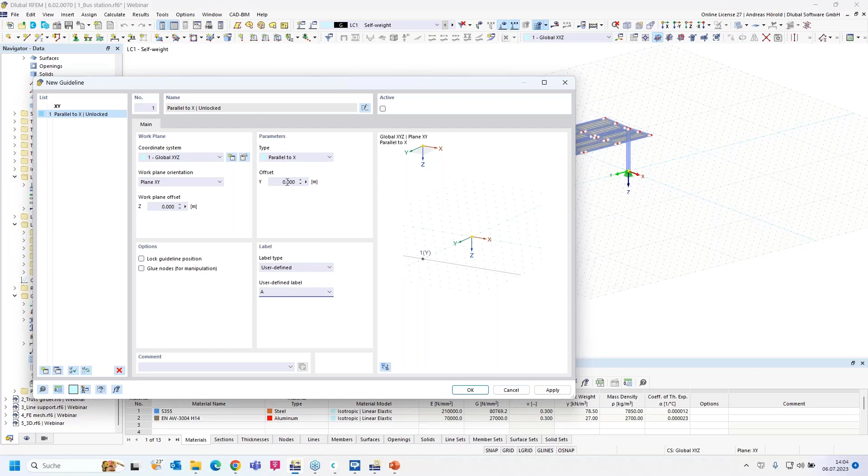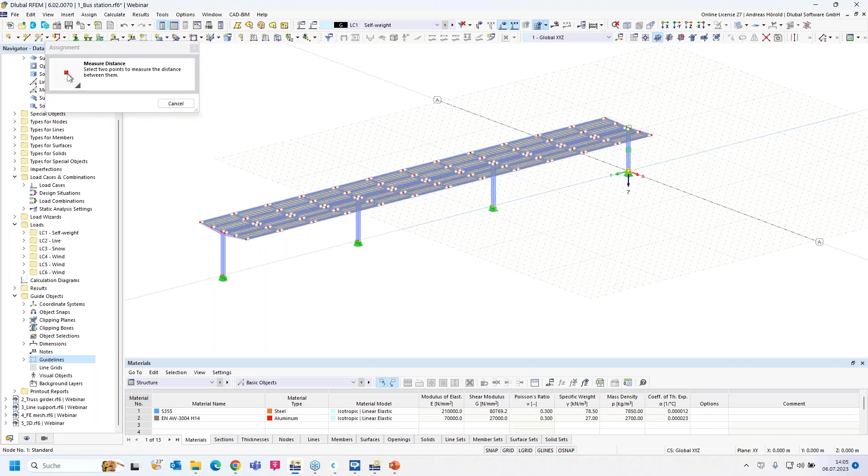So, okay, we start with the first guideline. We call it A, parallel to X, and we start with an offset 0, apply, and you can see in the RFEM window that the first guideline is created. We activate it, and then we copy the guideline, and we have to change the offset. Let's measure the distance between the two columns here. Okay, 18 meters, and we have to rename the guideline.

Apply. Okay, then we create the other guidelines, the same workflow, 36 meters, and we rename the guideline. Apply. So, and then the last guideline, I change only the offset and the name. Okay, so all the guidelines in X direction are created.

Now you can see the distance between the name of the guideline and the node is very far. You can change that. For example, when you change the grid, here by a right click, you can press edit, or I leave the dialog and show where you can find it as well at the top: tools, work plane, grid snap, and so on. Okay, then you can enter distances here, 15 plus and 15 minus in X direction, in this direction.

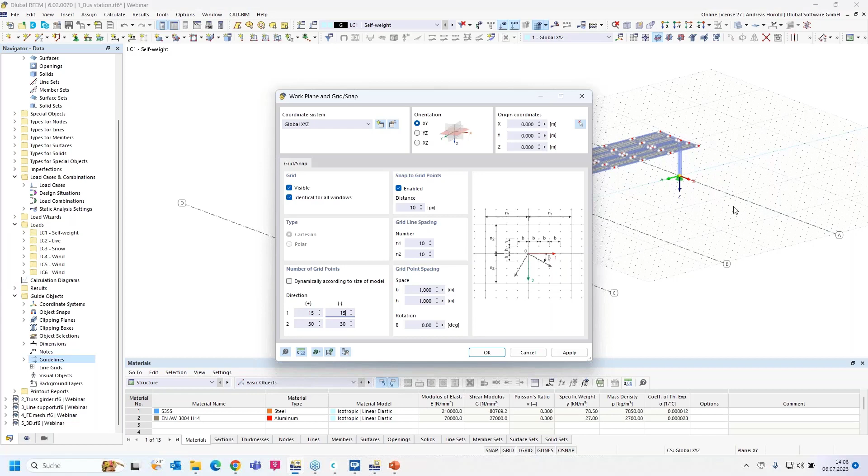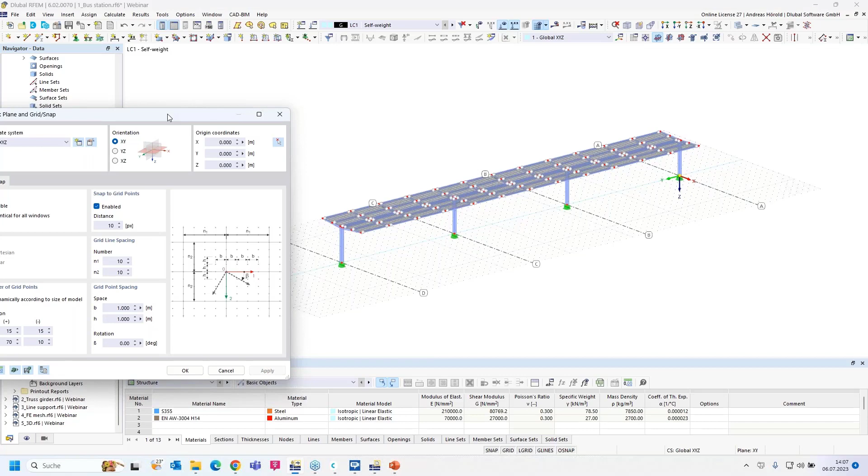And for example, 70 and 10 in Y direction. I apply. And you can see the name has been moved near the node. You can also check dynamically according to size of model. Let's do that. And you can see that the number of the grid points are created automatically.

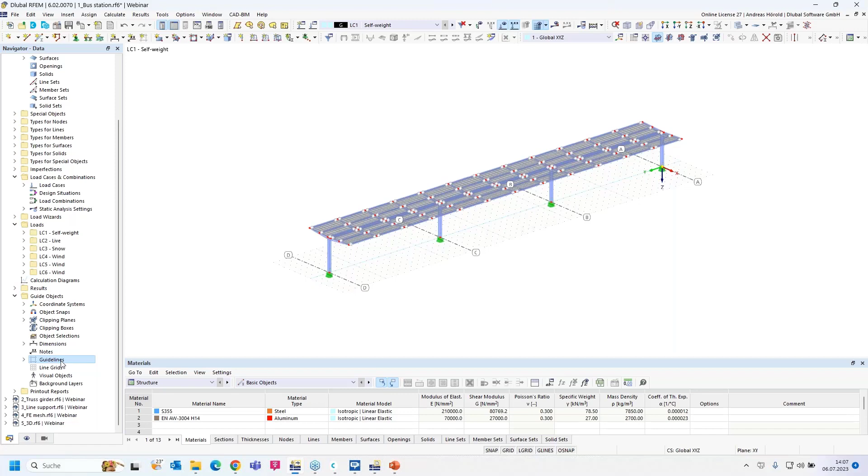Now let's create the last guideline in Y direction. I create a new guideline parallel to Y, offset 0 and a user-defined name. I name it 1. Apply that. Now all is okay.

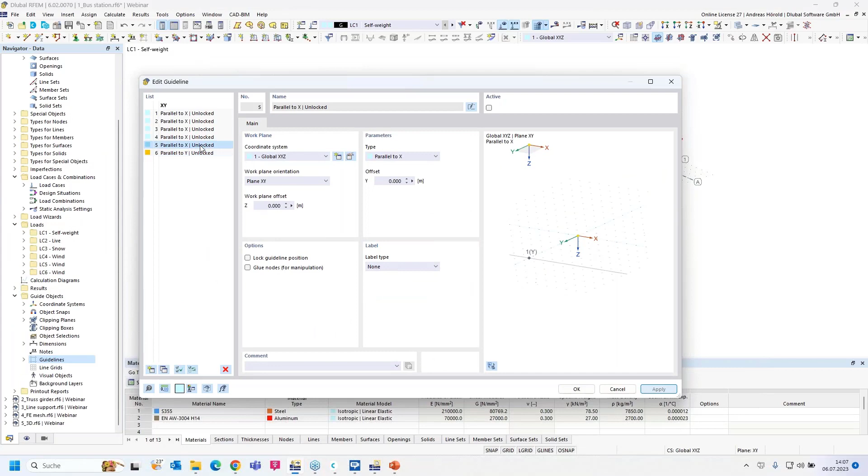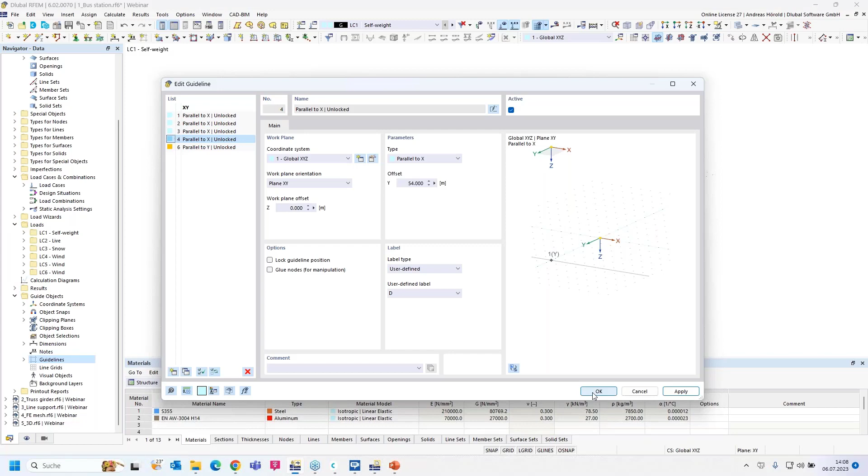So, no, this one is not correct. Okay, now you can move or copy or delete all the lines here or certain lines. Okay, now all guidelines are created. Just an example. So then we turn to the next model and the next question.

Next question is, I came across the area of load application setting in the load wizard. How does this setting affect the magnitude of the load in my model? So this is a load that has been created with the load wizard. I double click on it. You can see that dialog. And how you can create such a load, I will show that.

At first, you have to select in the base data here left at the top under add-ons the load wizard; that must be activated, but this is a default setting. The combination wizard and the load wizard are selected by default. Okay, and then

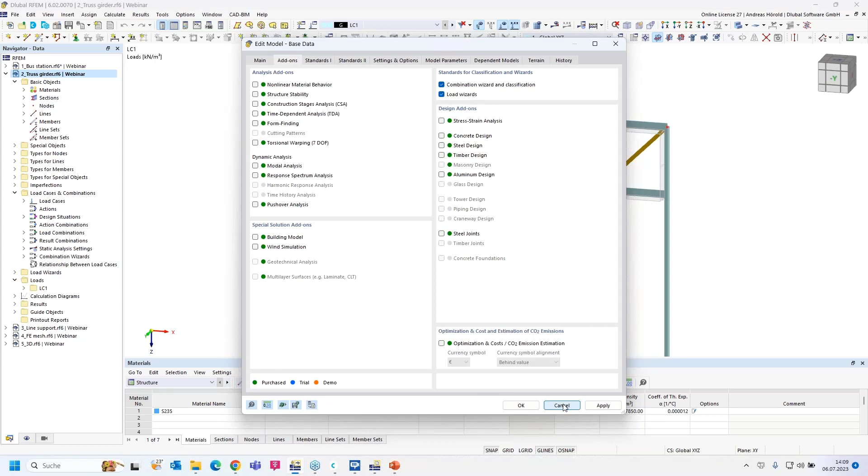here on the left side at the top, insert, there are the load wizards. There are different load wizards. Member load from area load wizards, for example. This is the load that I created before, what you can see in the model. There are also the snow load wizard and the wind load wizard, for example, and other wizards.

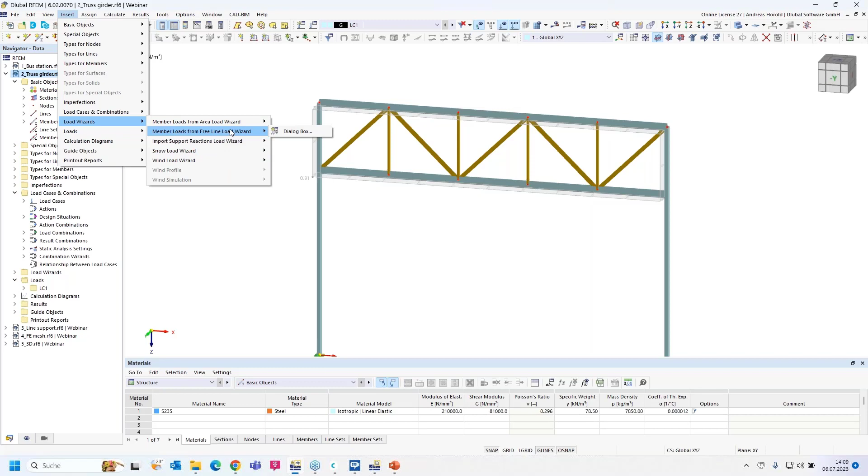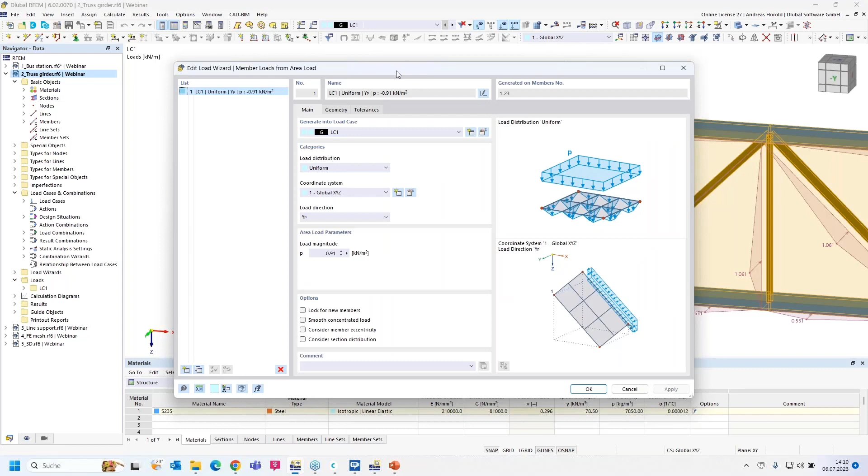Okay, I double click on, or let's display it separately. Now with a right click, I can display the loads separately. So, and now I double click on the load and I open the dialog. And under geometry, you can see this setting, fully closed plane.

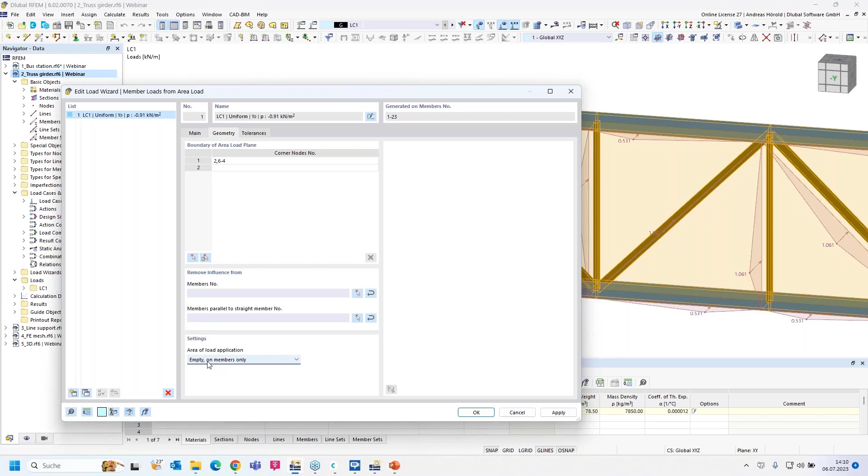The complete, where there's, for example, a plate or the trapezoidal sheet over the members, and all members get a load, and the wind affects the full area here. So, and if you want that only the members get a load, only this small area, then you have to select empty on members only.

We can see that at the moment the verticals and the diagonals get a load of about 1 kilonewton per meter, and if I apply that, you can see that the load has been decreased. Only the members are affected by a wind load.

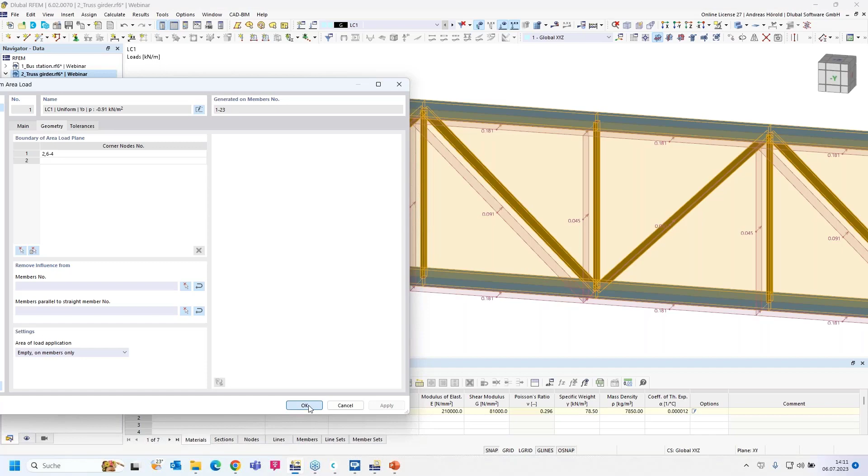So, and if you, for example, change that member, at the moment the width is 10 centimeters or 100 millimeters, and if I rotate the section, for example 90 degrees, you can see the load has been decreased from 0.1 as for this diagonal, and now it's only half of this value.

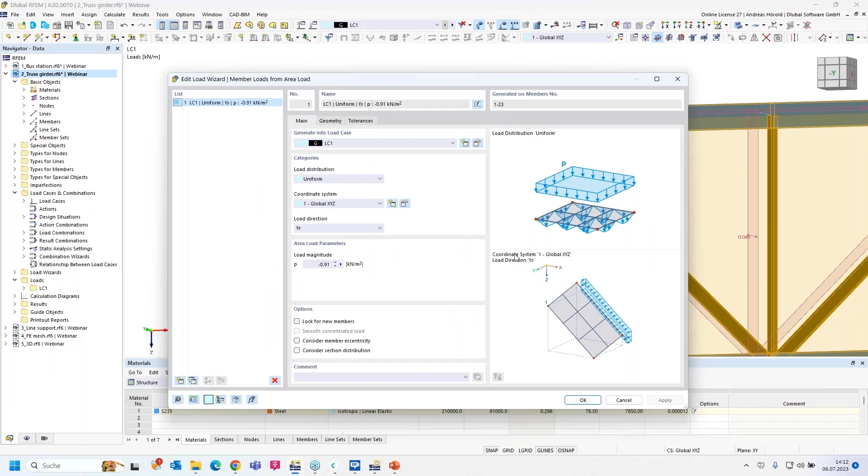Okay, that's the setting. I changed that back, or I press undo, and you can see now the load is about 0.1. And I do another change. Imagine that, for example, a trapezoidal sheet spans from the lower beam to the upper beam, and only these beams are affected by the load or support the trapezoidal sheet. Then you can remove the influence from members parallel to straight members.

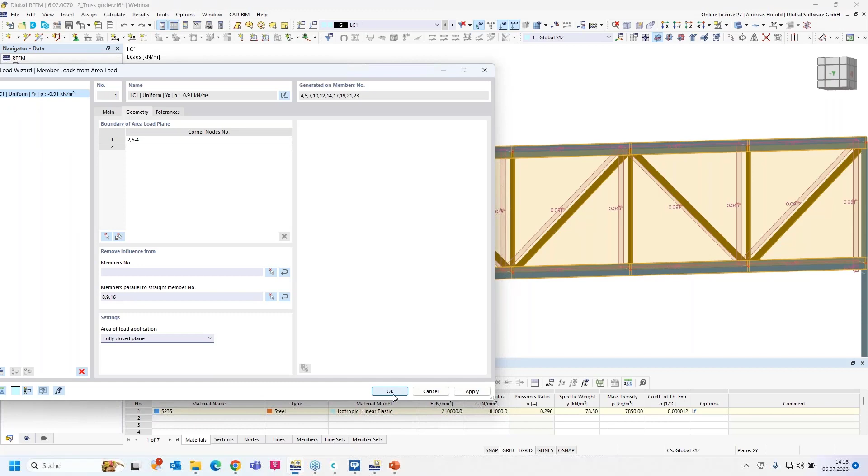Number, I select all the 3 members, and all members that are parallel to these 3 members don't get a load. Let's try that. Fully closed plane. Okay. So, and now that's the effect when a trapezoidal sheet spans from the lower to the upper horizontal beam.

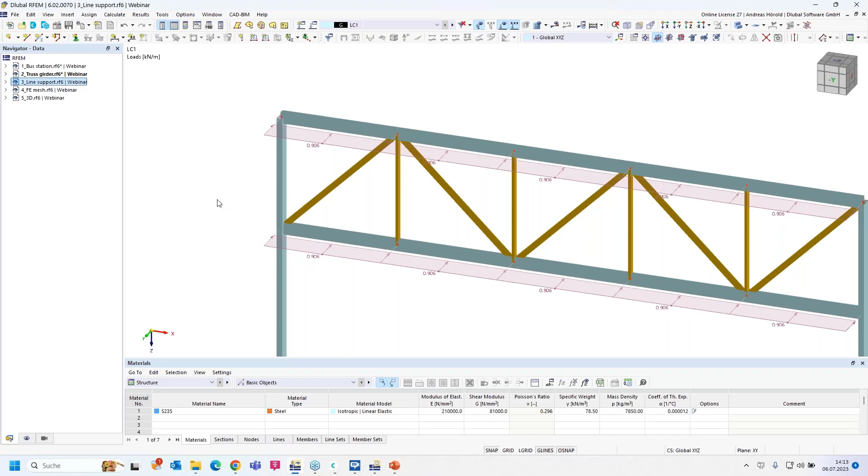Okay, let's turn to the next model and the next question. A surface model, a concrete slab from a building, for example. And the question is, can I get the program to calculate the spring of a wall for line support without modeling the wall at the same time? In an earlier webinar, we showed a similar feature for the nodal supports.

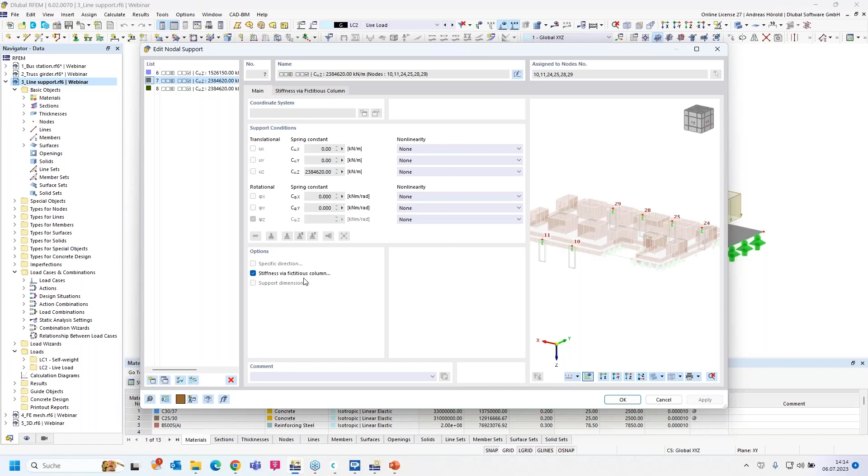Let's double click on this nodal support. And when I press the edit button, you can see where is selected stiffness via fictitious column. And when I turn to this dialog, the model is supported by elastic surface foundation, elastic nodal support, and so on. You can enter dimensions, the height, and so on.

Then if the column head is hinged or semi-rigid, and when you change that, the values for the springs are changing.

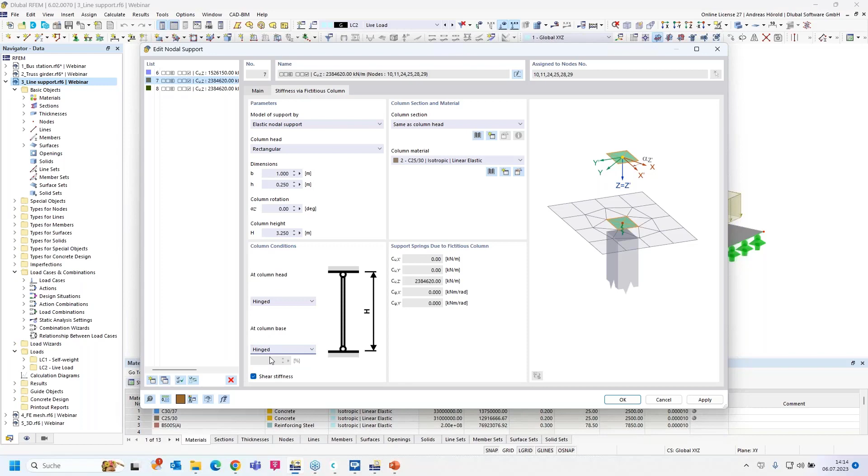Okay, so I leave the dialog, and we have got a similar function for the line supports. I double click on the line support and edit all the used line supports. Now you have to check the stiffness via fictitious wall. In the preview, you can see the walls already.

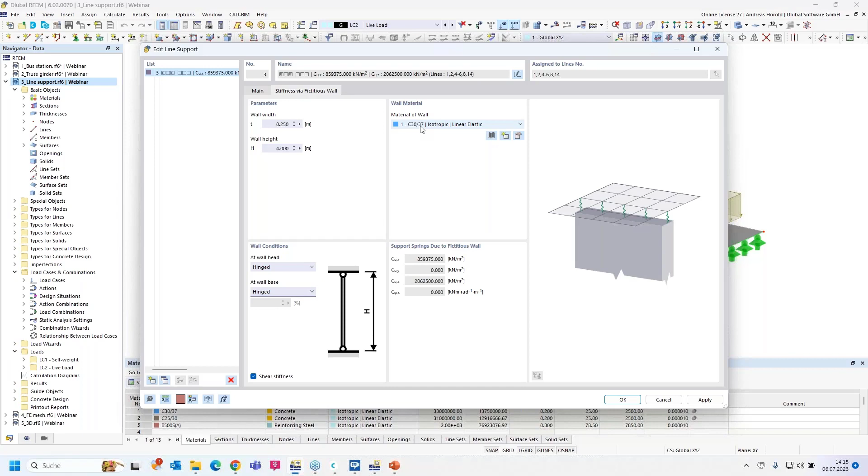So then you can enter a thickness of the wall, a wall height, and also if the wall head is hinged or rigid. Also for the wall base. You can enter a material; I'll leave the concrete material as it is at the moment. And you can see, as I mentioned, in the preview the considered wall.

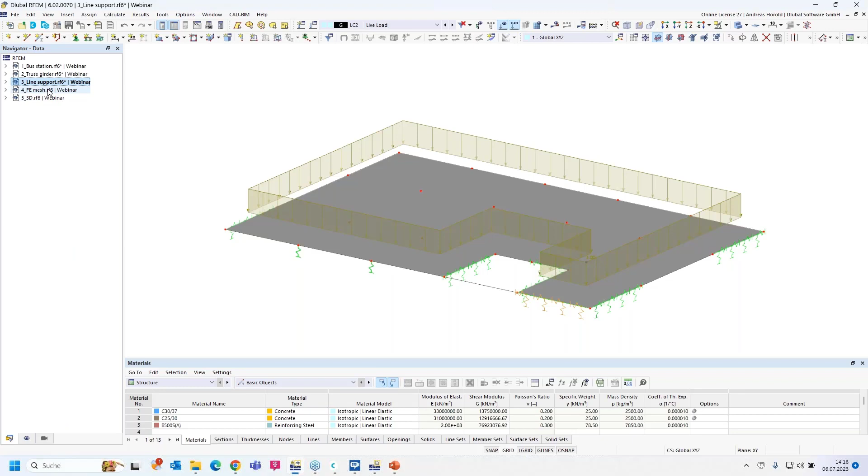Okay, and now you can see also springs for the line supports here. And this can avoid or smooth singularities in the FE calculation. That's the advantage. Okay, that should be all to this question and to this model. We turn to the next model and the next question.

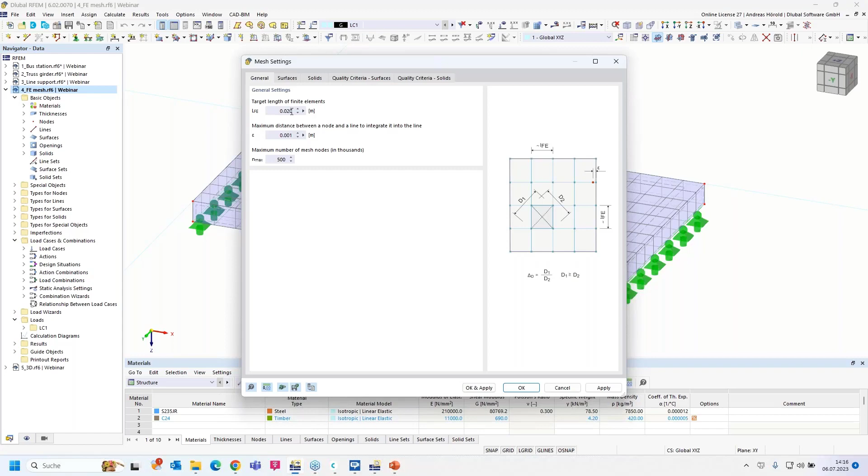And the next question is, how can I create multiple FE elements across the thickness of elongated thin solids without having to create an extremely fine FE mesh? At the moment, you can see a steel plate here with a thickness of 20 millimeters. I can go to the FE mesh settings. The FE mesh size is 2 centimeters, 20 millimeters. That's the thickness of the steel plate.

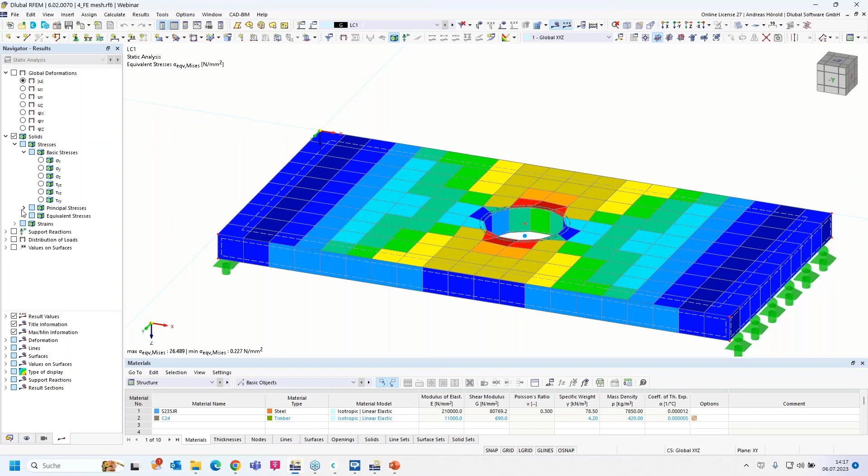And you can see for the width and the length, the size of the FE mesh is quite okay, but not for the height. There's only one FE element. You can see that in the results. There's only one FE element, and the results in that case, what is selected, the equivalent stresses, the sigma v. Mises, and that's not okay.

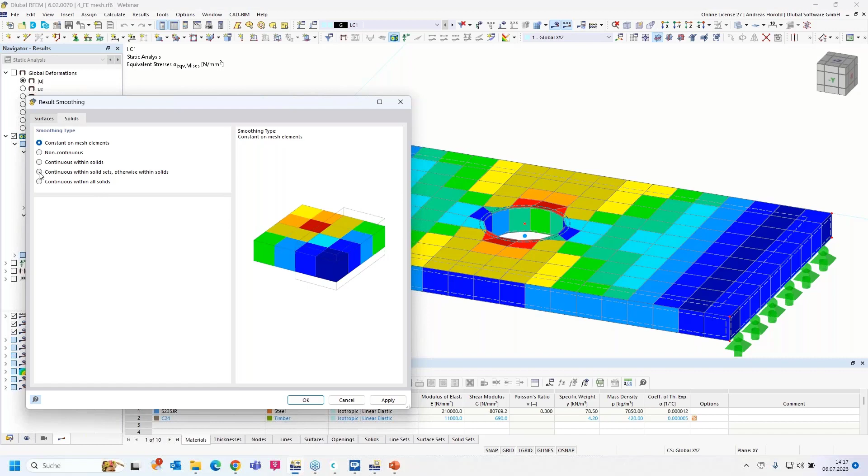For your information, under Calculate, you can find the result smoothing, and at the moment there is no smoothing. You can see that here, constant on mesh elements. Those are the real results without smoothing. With smoothing it looks quite better, but those are the real results, the constant on mesh elements.

So I double click on that point here to get in the dialog of the solid. Another possibility would be to go on the left side in the navigator data at the bottom, then open the solids. There's only one solid. You can double click on it or right click and edit, and the same dialog is opened.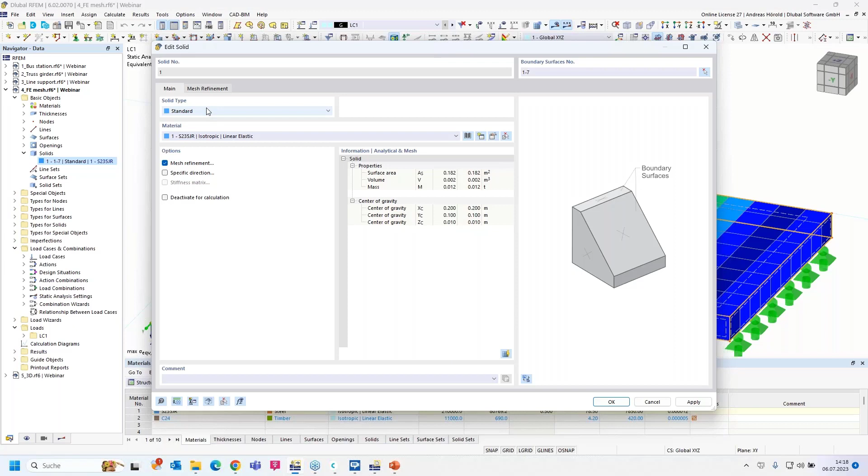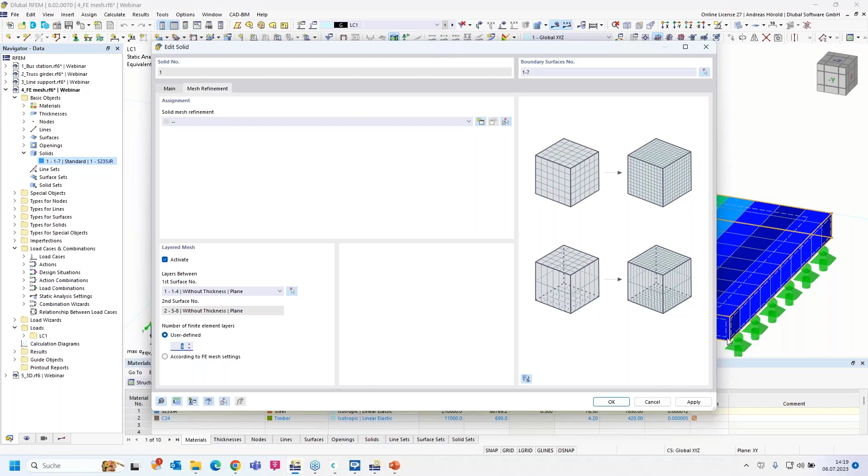So then mesh refinement I selected, and there is a quite new feature, the layered mesh. If you activate it and select one surface, then the opposite surface is selected automatically by the program. And you can see that in the graphic. You can define a number of finite element layers, and I increased it to 4. At least 4 or 5 FE elements should be for one distance here, in that case for the thickness.

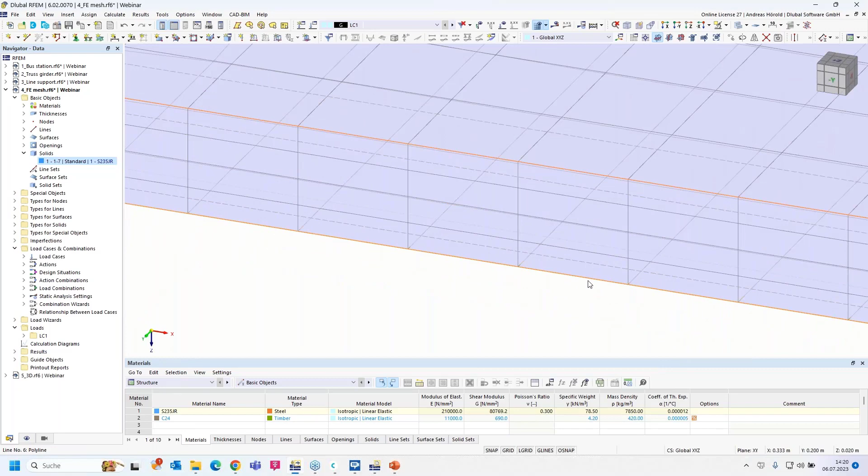Okay, I applied it. Let's go here at the top, and we'll generate the mesh. Okay, and now you can see there are 4 elements or 4 layers for the thickness. So let's calculate all again. Okay, that looks quite good. There are 4 elements in the height, and the results are better than before.

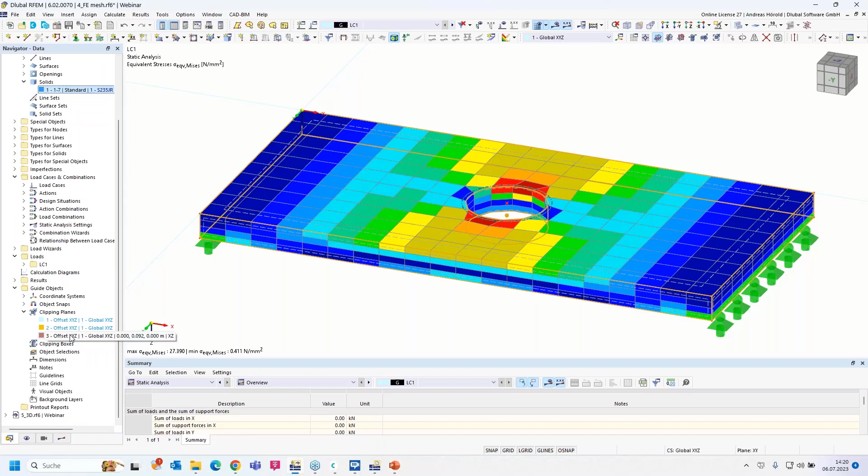Let's go through the solid here with the guide objects with a clipping plane. I activate any plane here, and now you can go through the solid and you can see the results are quite good to evaluate. Okay, that's all for this model and for this question.

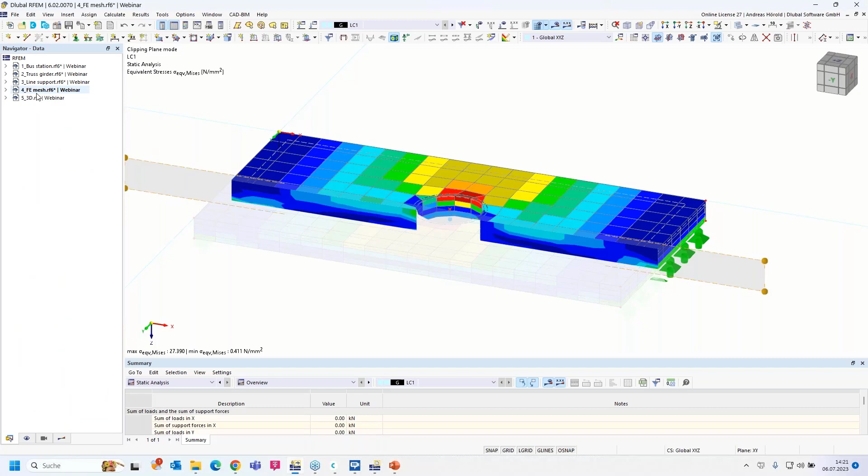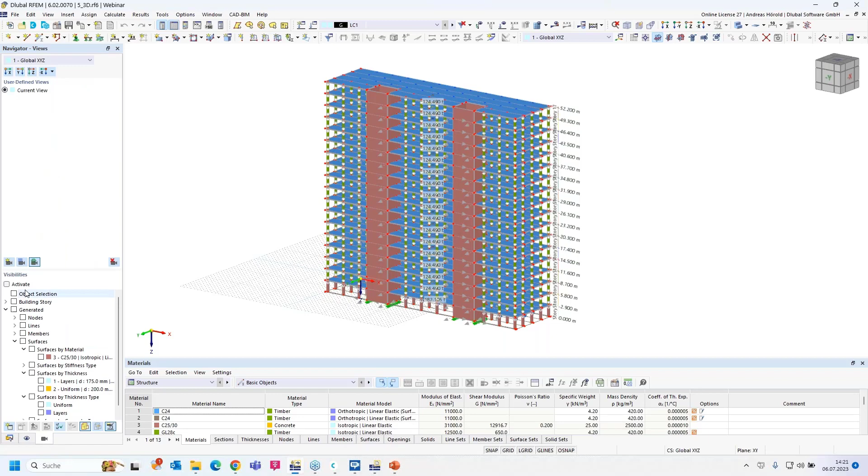And the next question is, how do I customize the appearance of objects in the background? So you can, for example, select only the concrete cores. Left at the bottom, you can go to the views and then activate the visibilities and the concrete surfaces. And you can see the hidden objects are quite good to see, but a lot of users ask, how can I modify the transparency? So how to do that?

Yeah, you can, of course, make them completely invisible with that function here, show hidden objects in background. You can deselect that and you can't see the deselected objects.

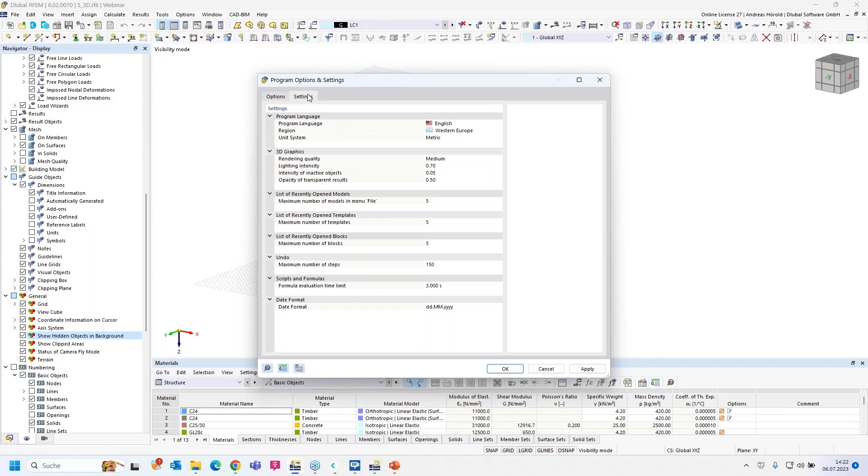So let's modify the transparency at the top, under Options. You can go to the program options and under settings, you can find that setting here, intensity of inactive objects. Now you can increase the number here, apply, and you can see the changes.

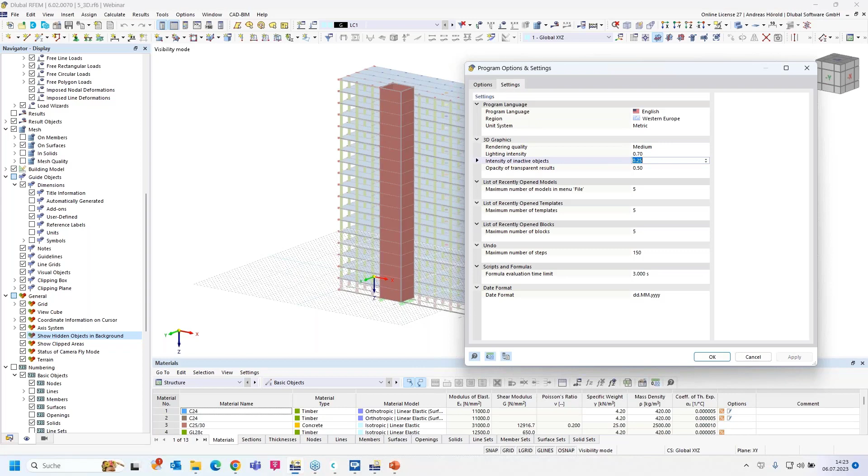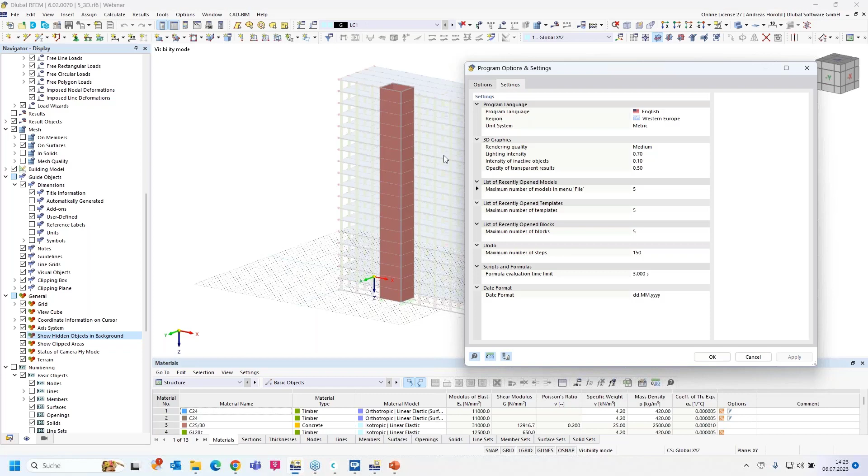Okay, a quite, I think, important feature, because sometimes it's annoying when you see all the deselected elements and so on.

Okay, so then we turn to the last question for today. I turn back to the first model, the bus station. I display the results. Yeah, the deformation is okay. So, and the question is, in the model space of RFEM 6, I can exaggerate the deformation according to a factor. How can I do the same in the graphic printout? Or rather, how can I adapt the same factor of the display from the model?

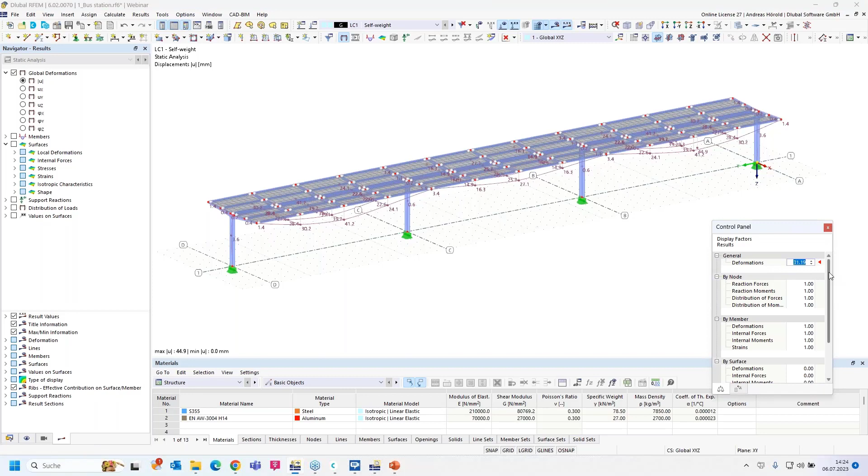So I select the control panel, or I display it, and you can change the number here, the deformation factor. You can increase it or decrease it. And the question is, how can I do that in the printout report? So let's print that graphic in the printout report. Here on the left, you can find the feature print graphics to printout report.

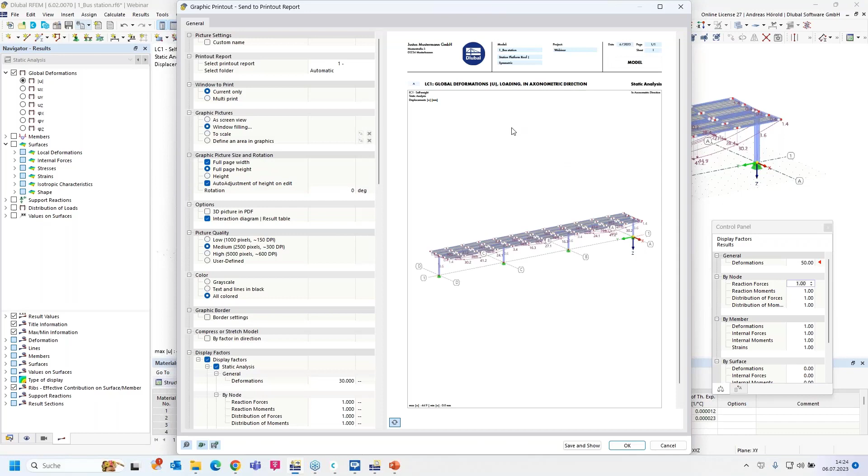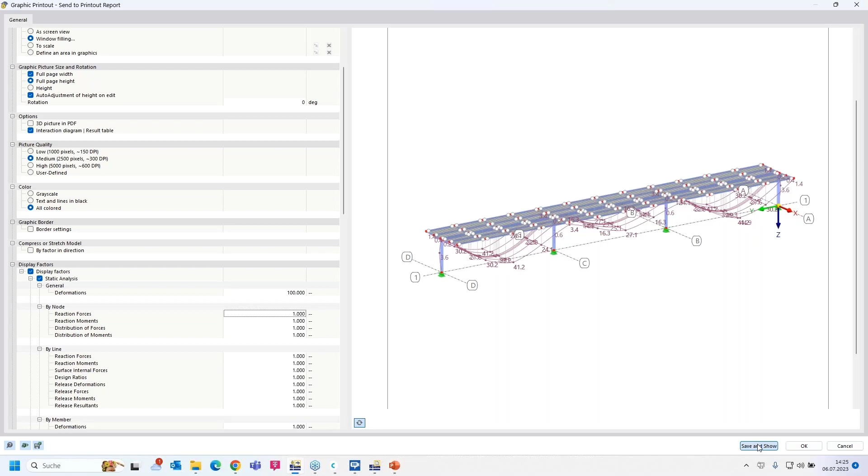So, under the default setting, you can select the display factor and the static analysis in that case here, because it's the deformation from the static analysis. And you can increase the number as well. And you can see the change in the preview here. So then we can press save and show. And we can see the graphic in the printout report.

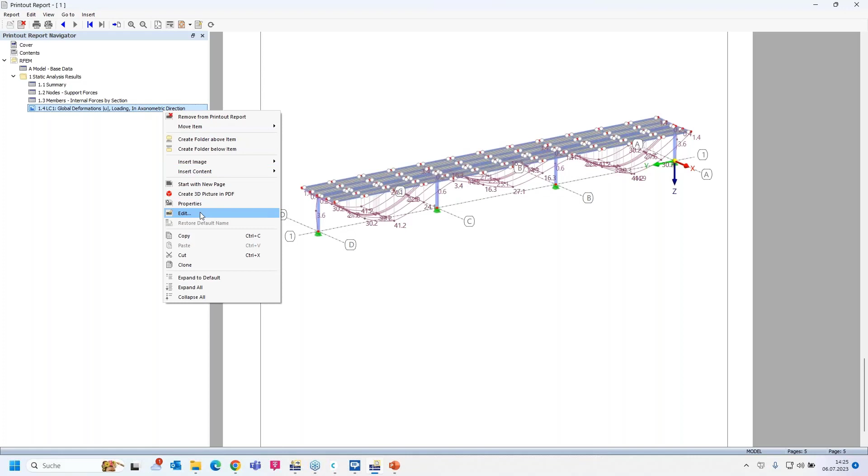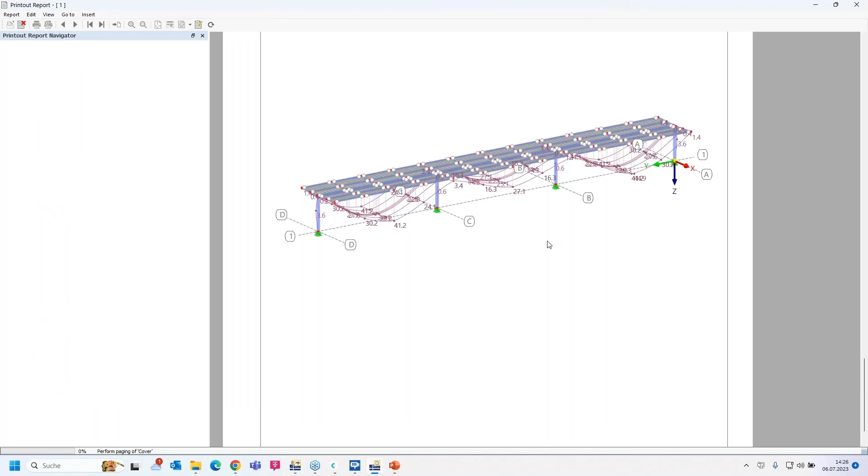And you can change or modify that graphic afterwards as well. So let's do that. I do a right click on the left side, then properties, or at first I press edit. Okay, then you turn back to RFEM, and for example, you can change the view, right at the top, for example, in X direction. Okay. So then it should be updated in some seconds.

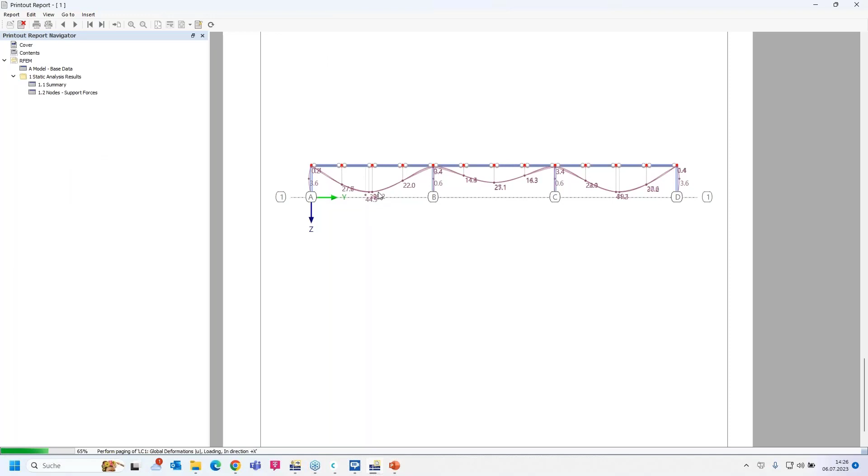Okay, and you can also change the properties. For example, the deformation factor. Okay, so the graphic should be updated. Okay, now I think a quite good hint.